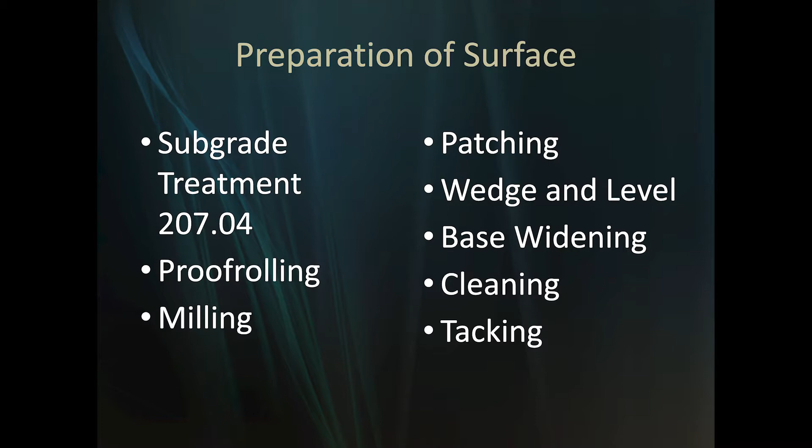Okay. Subgrade treatment. We have 10 different types of subgrade treatments. It depends on where it is on the roadway or on the embankment, et cetera. Of these 10, you probably have or will pave on 6 or 7 or 8 of these types of cross sections in your career, definitely in the next 4 or 5 years, depending on the type of work you do, because subgrade treatments are becoming more and more common, even on non-INDOT work. Subdivisions, rehabilitation of county roads and municipalities' roadways, even parking lots.

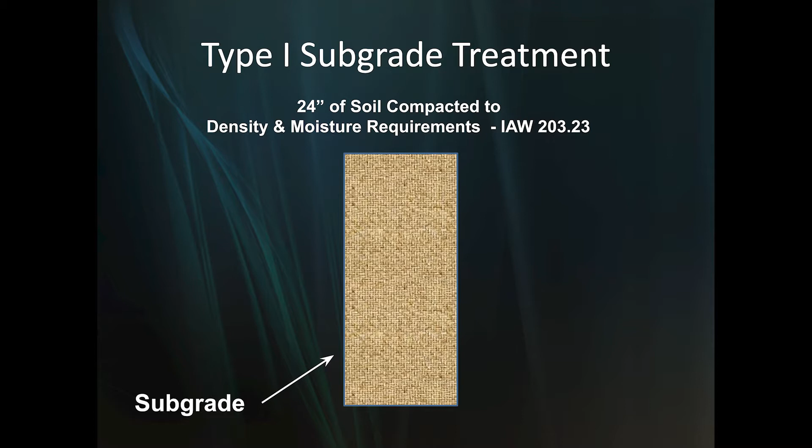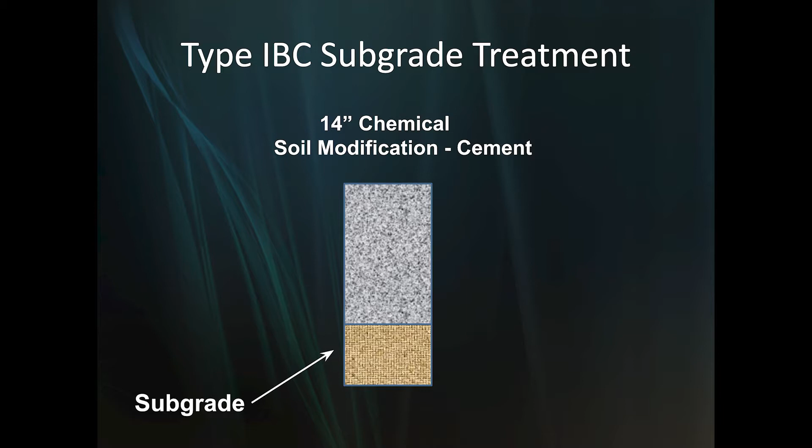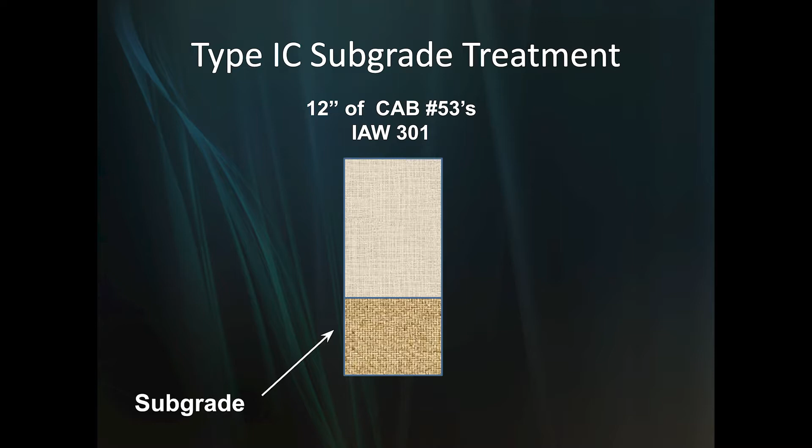Different ways to rehabilitate. Type 1A, not used. 1BC, chemical modification with cement. 1BL, chemical modification with lime. 1C, 12 inches of 53s in accordance with spec section 301. 1D, 12 inches of aggregate base. Notice that it didn't specify 53s, it's just compacted aggregate base with 2B check geotextile.

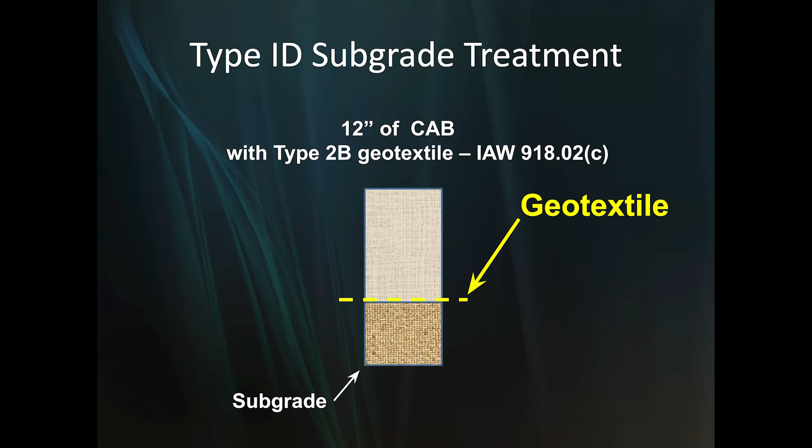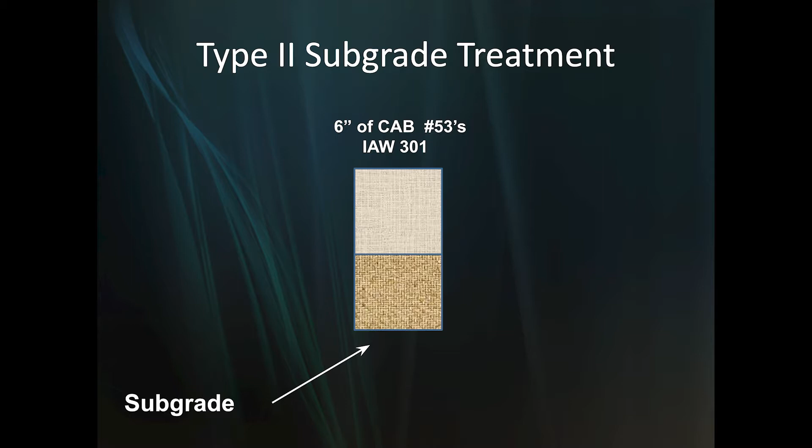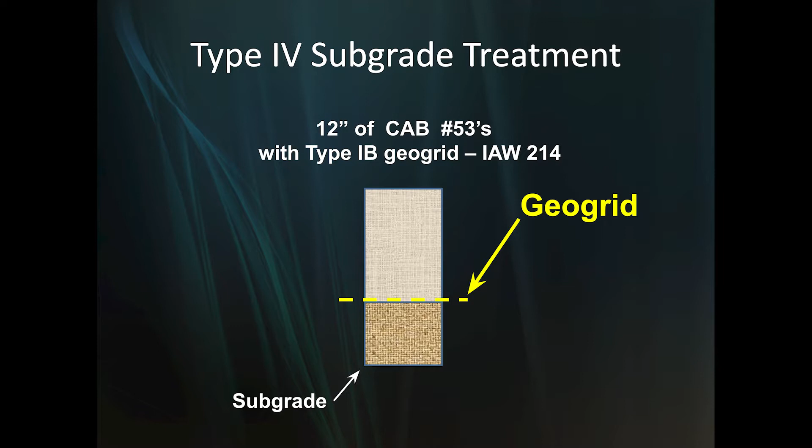Type 2 subgrade treatment, 6 inches of compacted aggregate base 53s. In-place compaction of whatever's there. Type 4, 12 inches of 53s again with type 1B geogrid. And there will not be a quiz on this, I promise you. I would fail it because I've kind of lost track of what all the types of geogrid and geocell and geo are.

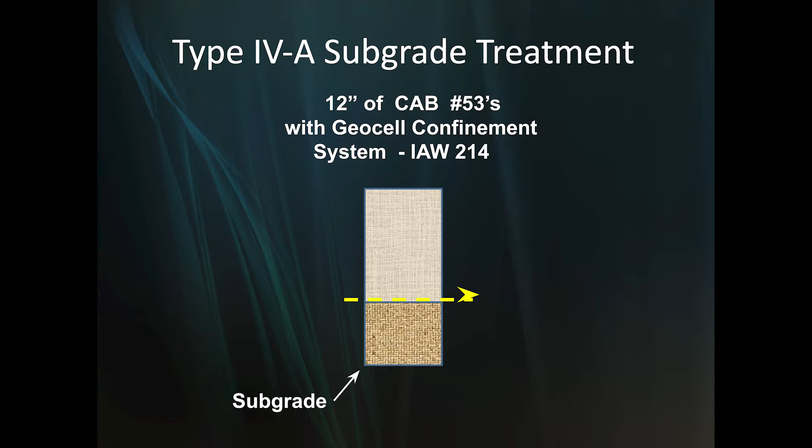So type 5 subgrade treatment, remove 3 inches of subgrade and put down 3 inches of 53s, about as simple as it can get. Typically you would see that maybe on a shoulder or somewhere because that's not adding too much strength. It's just getting rid of some punky subgrade on top, or topsoil, or something.

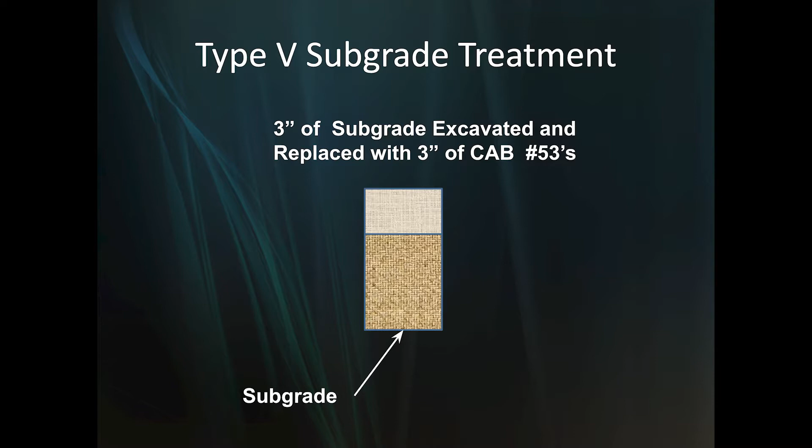Okay, let's talk about proof rolling. This is something that the department has changed a fair amount and really gotten more detailed about. So we're going to kind of hit the bullet points here. When proof rolling is specified, it shall be performed with an on-highway dump truck with a minimum tire pressure of 90 psi. Before, it talked about a pneumatic tired roller, so that was really outdated in a sense. It's a little more specific here.

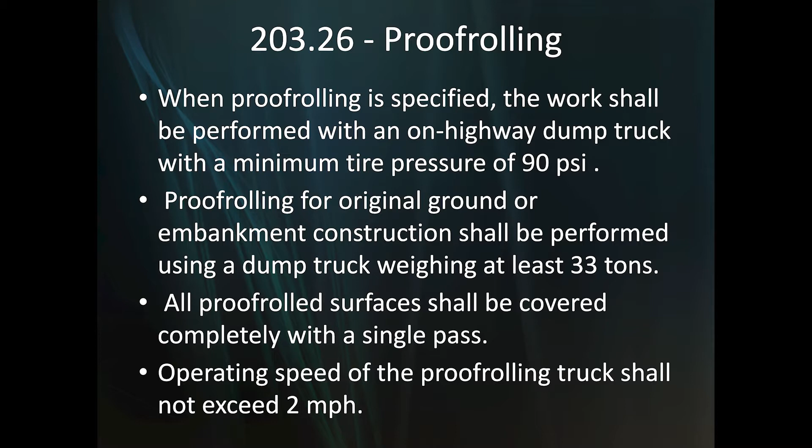It needs to weigh at least 33 tons. All proof rolled surfaces shall be covered with a single pass. Operating speed of the proof rolling truck shall not exceed 2 miles an hour. Deflections or rutting in excess of a half inch shall require remediation of the surface as directed. If it's in excess of 3 inches, we're going to get a hold of the department's geotechnical engineering division.

How many believe that? How many have experienced that? We take care of rutting in excess of 3 inches on a weekly basis on jobs, okay? But this is what the department wants us to do, so know that it's in there. These specifications can be your friend as well as the thing that somebody slaps you on the wrist with and says you need to do it this way. So know that it's in there if you need to use it.

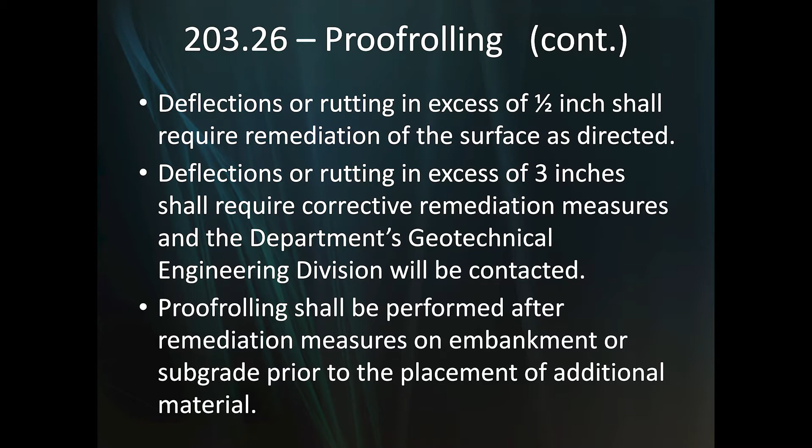Proof rolling shall be performed after remediations. Again, you don't just do the remediation and go, oh, it's good. You got to prove that it's good prior to putting any additional material on there, with 1 or 2 complete coverages, and roller marks, irregularities, or failures shall be corrected. Put a lot of thought into that, put a lot of good information in there.

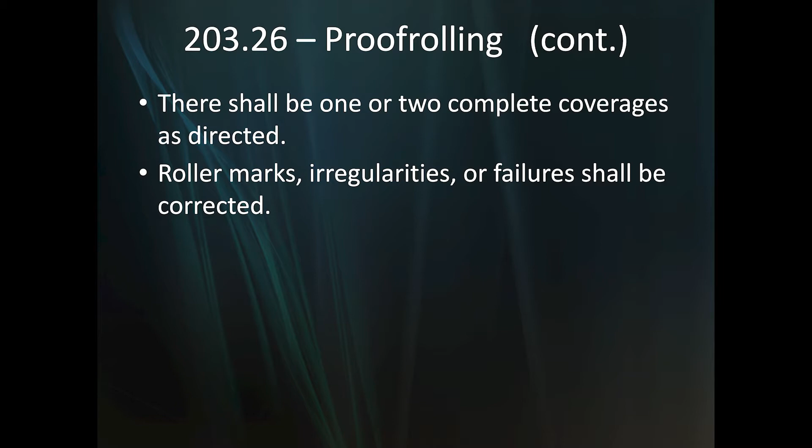That's the first time I've seen that. Hats off to you, department, you did a good job.

Partial and full depth patching. We're just going to hit the high points here, folks. It needs to be marked by the INDOT personnel.

I'm bringing in some personal job experience here. This has changed over the years. It all kind of depends on who you're working with. We have times where at the pre-construction meeting, or after it, before we actually get out and proceed with the job, the department wants us to go out there and mark it. We're supposed to be doing it together, or the department's supposed to be doing it. I would suggest partnering up.

There's traffic control that often needs to happen. Oftentimes also, the old patch list was put together and not checked from 2 or 3 years ago when the job was scoped, so the patching very likely will have grown. So you need to know what you're going to have to patch and what it's going to look like, and do that together.

You're going to patch with 402 mixtures. In other words, it's not going to be plate sampled, and it's not going to be density controlled by cores. If you're using a mix that has an MAF, a mixture adjustment factor, which is very unlikely, it's not to be applied to how you're paid.

Typical sections, and we're going to see a picture of this in a moment, are generally given. This is the patching cross section we want you to attain. You're going to get paid by HMA patching type A, B, or C. And I like to throw this out there for folks that haven't been doing this very long and might be bidding work or whatever: remember, you have to include the cost of excavation and hauling that material off in that pay item, HMA patching type A, B, C, whatever.

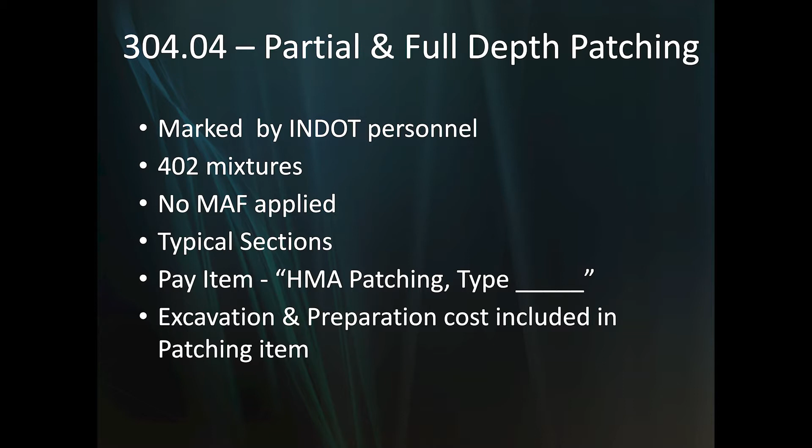Here's a typical cross section that would show a patch. There's a 2.5 inch overlay of 19 millimeter and 1.5 inch of surface, but then below that it's showing the existing pavement. In this particular example, they want you to go down an unspecified depth here. It's not detailed out, but they want you to go down below the existing subbase. Just a typical patching section, what one might look like in the plans.

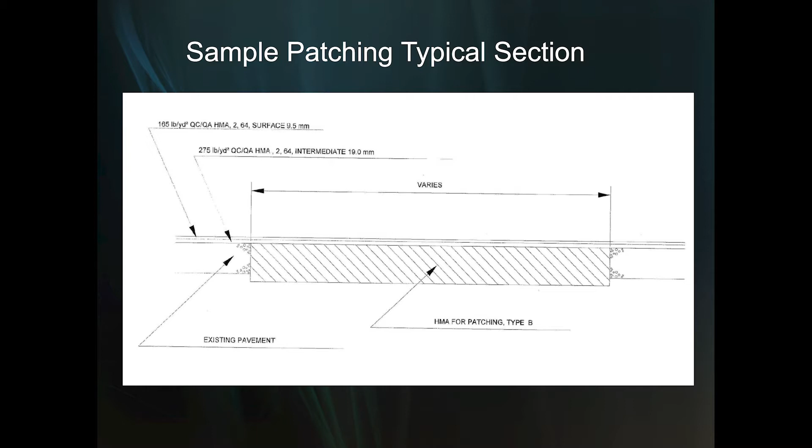Let's talk about widening. Again, 402 mixtures. It's not density controlled, it is not plate sampled, and again no MAF applied. Typical sections will normally be given. They're going to give you a width, a depth, and tell you the materials they want you to use in the different layers. It's paid again, HMA widening type A, B, or C, and again the cost of any excavation for that widening is included in the cost of the item.

If you're widening and whatever you're widening decreases to a width of 3 feet or less, you need to use a trench roller. I think it was Nathan said earlier, he's been on a lot of jobs and hadn't seen one yet. Typically they're 3-wheel, with one offset for balance, and the other 2 wheels are in the trench and will be what helps get your compaction. And they specify the roller passes typically for widening according to what you're laying.

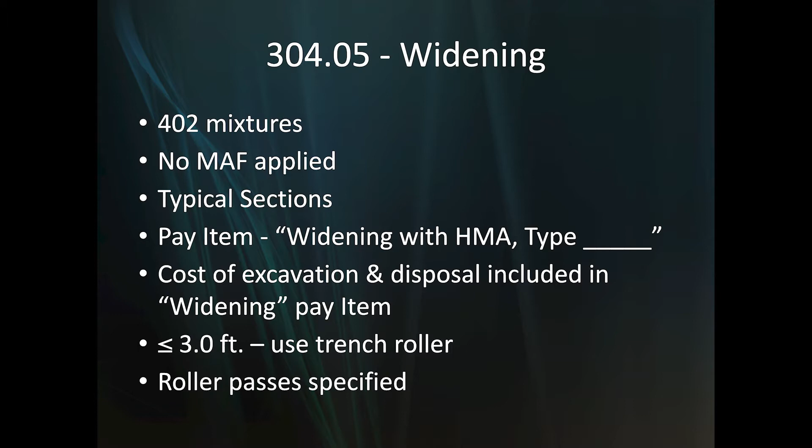We have had an ongoing dialogue for quite a number of years with the Department of Transportation as contractors, and I'm going to talk a little bit more about that when we get into the actual widening bullet points. You'll be given a detailed picture in many cases of what the intent is as far as the widening, but just know that oftentimes when you're widening an existing road to a certain cross section or cross slope, it's not going to match up real well with what you've got there, so you may need another tool in your toolkit.

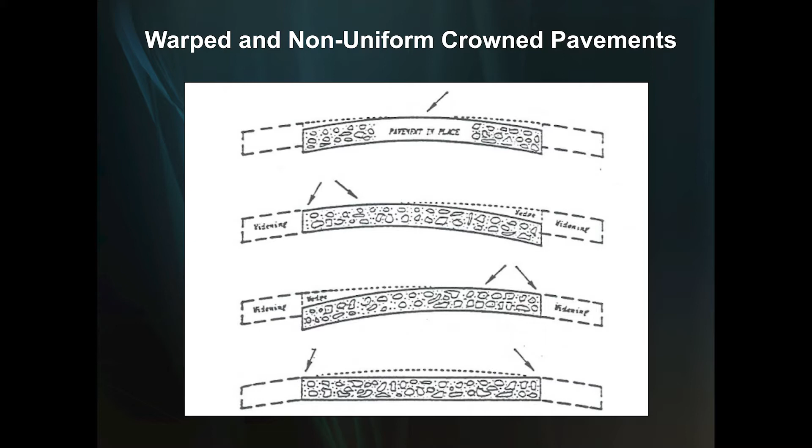Brings me to one of my top 3 favorite subjects, which is wedge and level, specified in section 402.07(b). You can look it up, it's like 2 sentences. There's not a whole lot said about it.

Also, what it does say: coarse aggregate angularity, CAA, does not apply when wedge and level is to be covered by intermediate or surface. That's a mix design requirement. You don't have to worry about having specialized aggregates so your tires get good skid resistance when you're doing a wedge and level.

Bullet point number 3 is entirely mine. This is my take on what's happened over the years, and I know Matt will agree with me because we've had this conversation many times. Wedge and level in the early part, and probably even some in the middle part of my career, which I've been doing since 1986, was overused and abused for a time.

One of the points in time when it was overused and abused the most was before INDOT began wholesale milling. We used to overlay a lot of roads without touching them with the mill. So a lot of times we ran into conditions exactly like you saw in those previous pictures, and the only thing you could really do to get some decent shape out of the road and put an even final coat on it was to do a wedge and level.

But it was overused and abused, and the federal highway basically saw, in all honesty, tens of thousands of tons some years that were switched from QC/QA mix to wedge and level and not tested for density, and no plant samples were taken, et cetera. So the department said we got to kind of slow this down.

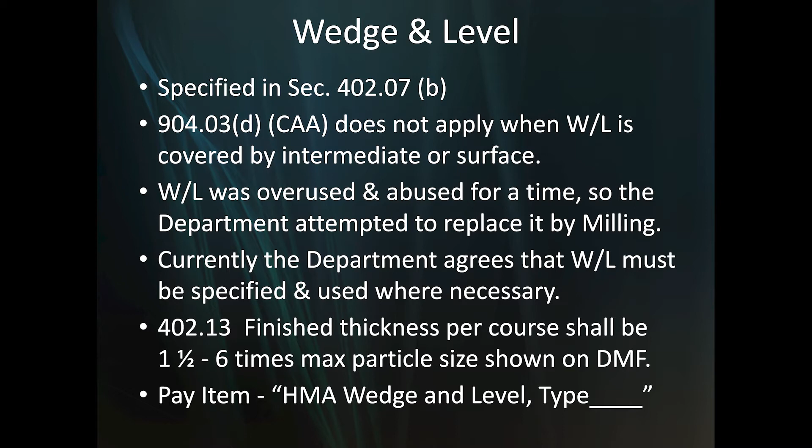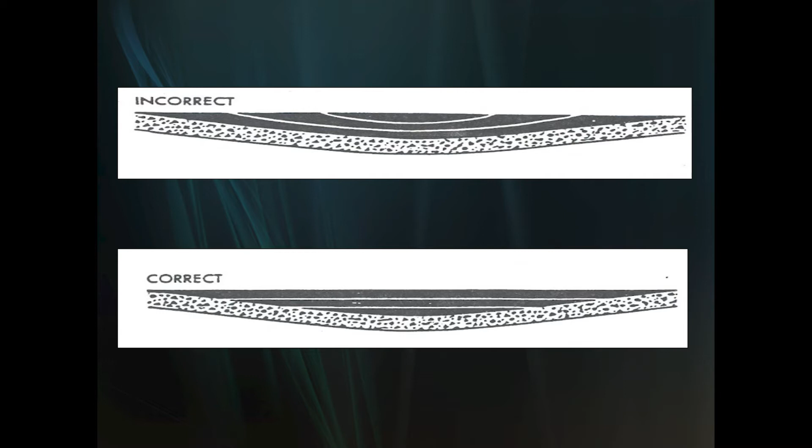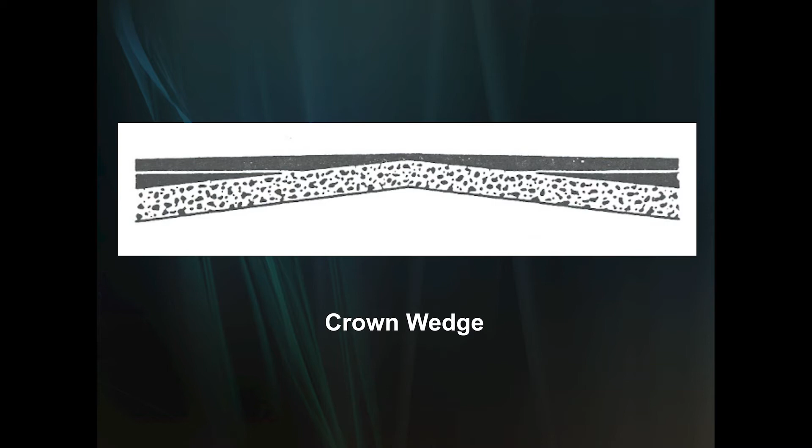Probably not, unless somebody told him to, okay? And that's what we need to start doing more of - making sure that we fill in those little gaps, and we have to do it right.

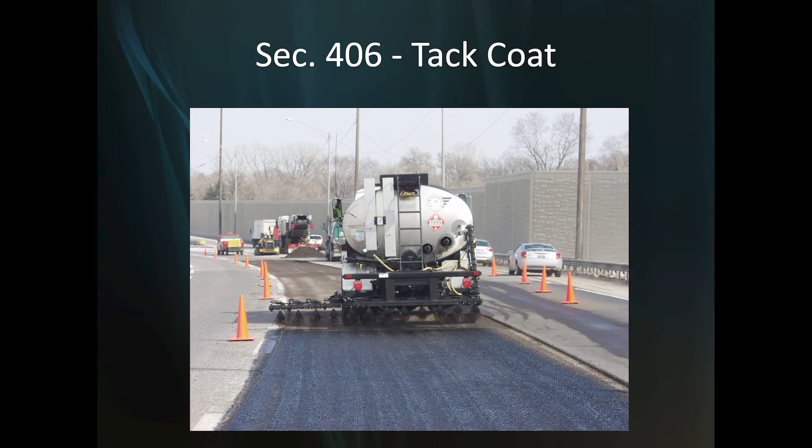Tack application - there are 3 different materials you could use: SS1H, AENT, and PG6422. None of this is new, it's been around for a good while. Again, Nathan hit on this, so I'm just going to speed through them.

No foreign materials deemed detrimental by the engineer. No standing water. Clean of dust, debris, and any substances that will prevent adherence. That dust part is a little bit subject to interpretation - there's no such thing as a perfectly clean construction site, but you've got to do your best.

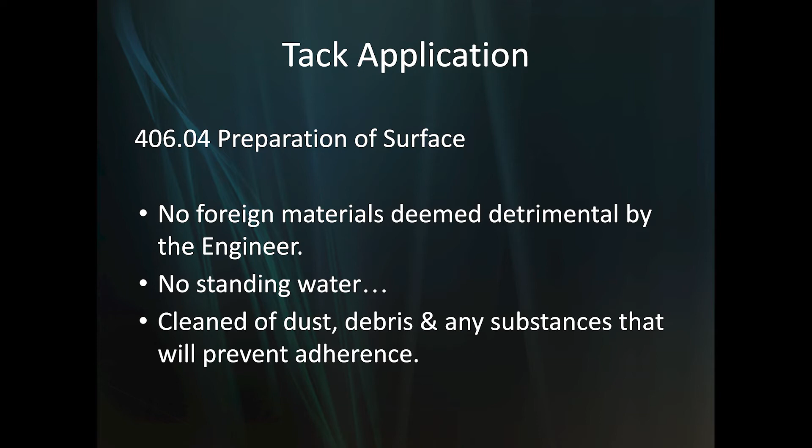Application rate - the goal is 95% uniform coverage. We talked about that. We've got to allow time for it to break and set. Nathan covered that rather effectively.

Breaking is when it changes color - it's starting to evaporate some of the moisture, some of the water that the tack particles are suspended in. Setting is when it's basically on its way to being dry, or is dry, and you're going to have a lot less pickup if you get it out there, get it applied, and give it enough time, given the conditions you have, for it to break and set.

Ponding and streaking shall be corrected, and we're going to see the tack application rates on the next page.

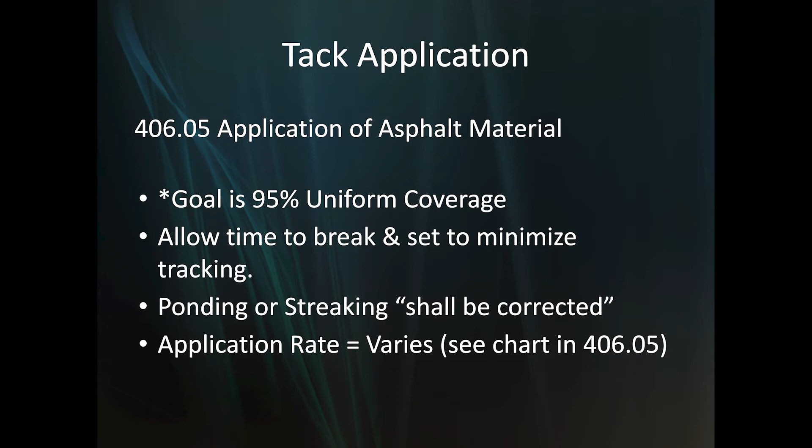Thank you, more surface area. When I'm trying to get this picture across to people, I say, okay, if you take a 1 foot by 1 foot or 3 foot by 3 foot section and it's perfectly smooth, this is how much surface area you have. Now, if I wad this piece of paper up and spread it back out, I've got all these little high points and low points, but it's still 8.5 by 11. I've got to cover more surface area.

The other things have to do with porosity. So the department's done a good job working with industry trying to come up with these application rates. If you shoot in these areas, you should be fine.

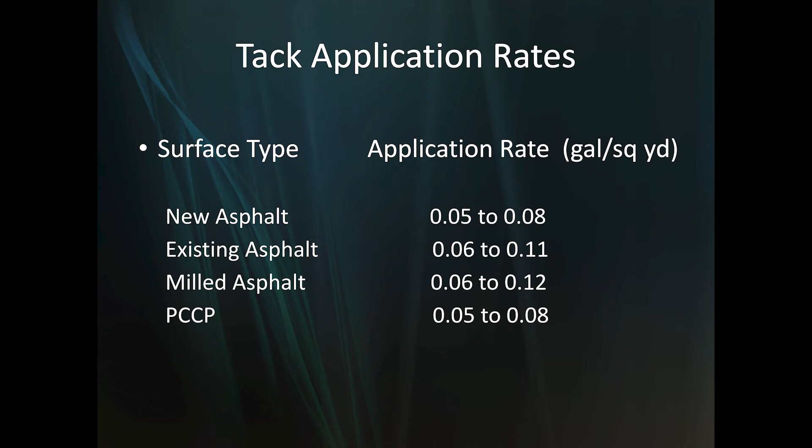This is the part where I'm going to depart from the slides. I've been in this since 1986. A few of you may have been in here longer, quite a few not quite as long. I'll be the first one to tell you I was taught a lot of things by some very, very good men and women, and some very well-meaning men and women. And I was taught some things that we now know there's a better way to do it. This is one of them.

There's never, and I'm going to say it again, capital letters, three exclamation points, there is never a condition where you're laying a layer of pavement on top of another layer of pavement of any type when you shouldn't tack. Never.

How many people in here were taught, well, we just laid that this morning or we just laid that yesterday, it'll be fine? Again, 30 years ago, our mixes and overall binder content more resembled what we're laying today, and that's probably why we could get by with that. We had more asphalt on the surface area of both lifts, and it helped stick each other together a little bit.

But listen, liquid asphalt technology has changed. The way that it's made has changed. Our mixes got drier for a time. Now they're back where they really should be and similar to what they used to be. But guess what? That is not the thing that's gluing those pavements together. You need to have something glue it together that is like glue, and that's what tack is. It helps you with your shearing, it helps you with loads and the pavement moving and trying to stay integral.